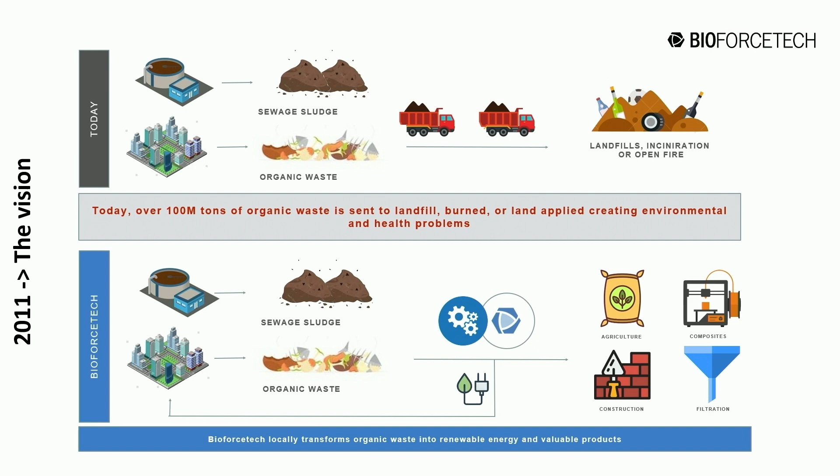So the first thing we did is we were like, okay, let's make energy out of it, and maybe a product will come out. So we started with the mini gasifier, which was a terrible idea because biosolids is full of minerals. Those minerals solidify in the gasifier, and you find out that the whole thing gets stuck with this very hard material within a few hours.

And it was good, but the thing is, we needed a lot of fuel because we had to dry that biomass, and so there were still some issues. So we said, okay, we need to focus on drying then, because if we have all this biomass but it's full of water - there's 80% water - what do we do? How do we make it into this final product, or how do we make energy?

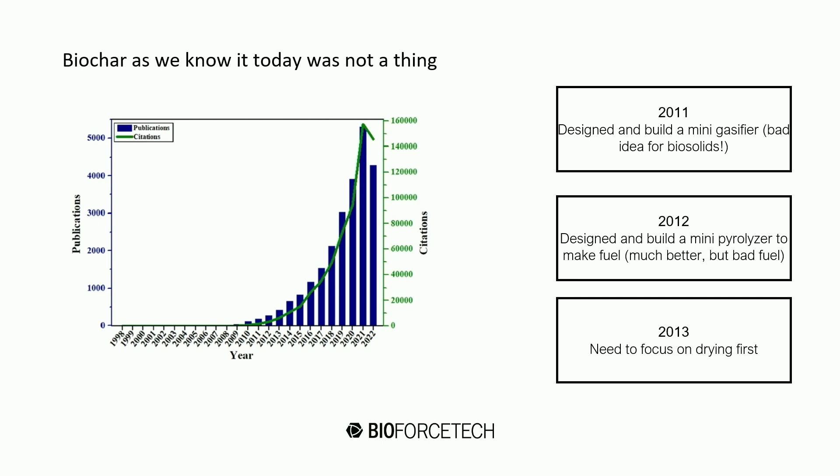And so we pivoted completely. We're like, all right, we need to invent a dryer, because dryers are available in the market, but they use a ton of energy - more specifically, about 1 megawatt hour per ton of biosolids just to get to the dry part. And then with the pyrolysis, you can make maybe 300 kilowatts. So it's completely nonsense - we're not making a sustainable solution like that. We're just trying to get rid of waste.

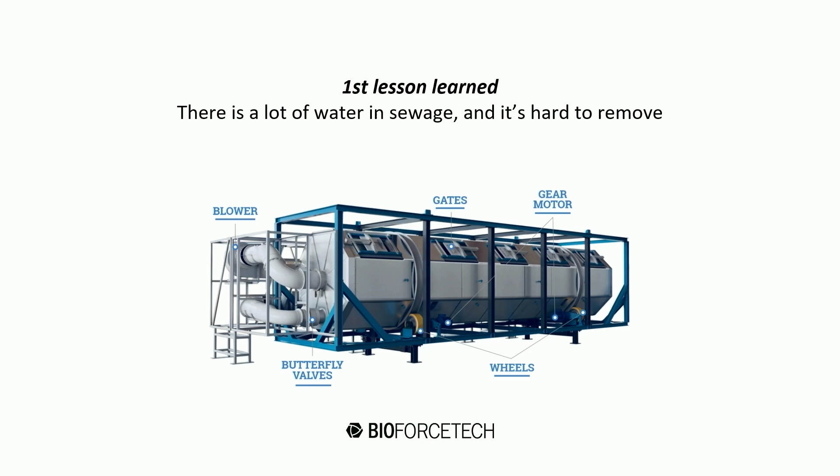So the first lesson learned is that there's a lot of water in sewage and other types of organic waste. So we invented this machine. It took us a few years, but the concept is we have this big vessel. We load about 8 tons of material in it, and with the batch process, we optimize it so much the bacteria can heat up the biosolids on its own without external heat to about 65 Celsius, which is decently hot. That's enough for air flowing through to just evaporate the water naturally. That let us save about 70% energy compared to other systems out there.

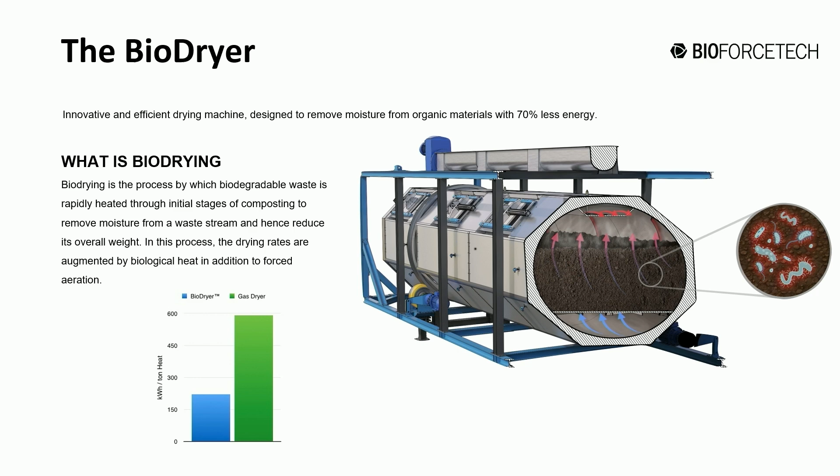So we found something that was good as the first step of the process. We pivoted and then it went pretty well, because we now have more than 50 of these units running already, with many, many more to come throughout Italy and the United States. It's for sure the most efficient dryer on the market.

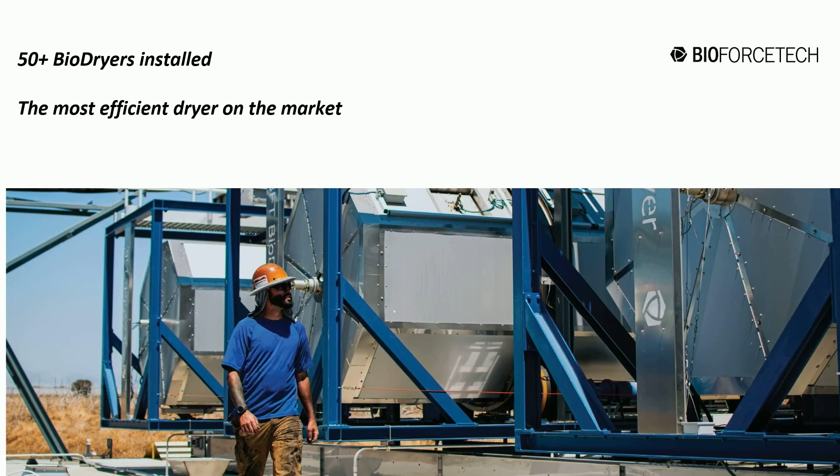But the lesson we learned here is that with new tech, if you're inventing something new that didn't exist, like a biological drying system, it's never going to work the first time. So if you're thinking about an innovation, I'm sure I'm not the first one to say that, but it hit us. We were young and naive, and we thought we'd design it, it would work, and we'd sell many of these. Absolutely not. It took forever.

The first biodryer, for example, was very efficient but super slow, so it didn't make sense financially. The second one was efficient and fast, but required too much maintenance, and so on, and so on.

All right, then we had a dryer. We could do pyrolysis. So we were like, okay, now we're going to start building systems and installing them. We decided to start in California, which has the strictest air district in the country. To be able to turn on something like this, you need permits, and permits took us 4 years. So you're a startup, you invented new tech, you already spent a lot of money, now you want to start making some money, and that slowed us down for 4 years. But still, that brought us to have the first pyrolysis of sewage sludge in the United States permitted, and it was permitted in San Francisco, which then allows us to distribute it around the country with ease.

So the third lesson learned is that it's going to take much longer than anticipated. Any project, I'm sure everybody knows it, if you've ever worked on your house or built a new house, it usually takes double. It took us a little bit more than double, but it took us about 10 years to get to a reality where we had an actual system running and producing and doing what it was supposed to.

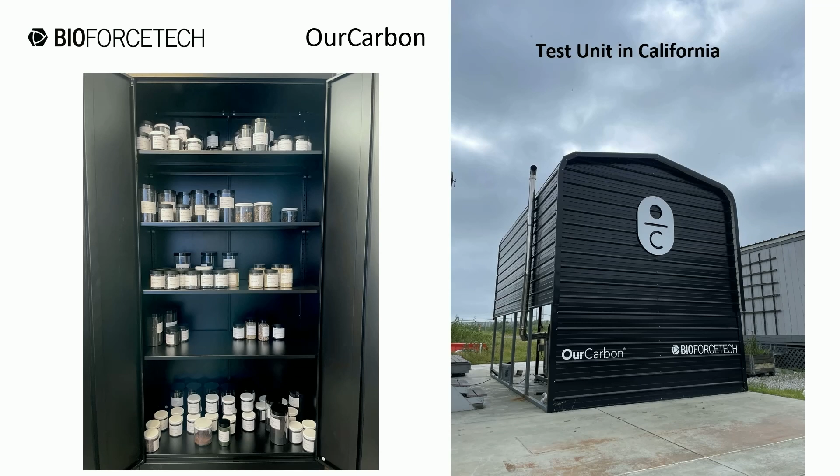So first, we have a test unit in California. It's a tiny little unit, but it replicates the full scale. We've already done hundreds of different types of biomasses, and we use it to study how the biochar looks in many different residence times and so on. The unit is meant to replicate the big one, and we contract with different municipalities or waste producers to run tests on it, setting very different residence times and temperatures, fully automated. We can produce just a few kilograms of biochar per day, but that's enough for us to do the tests we need.

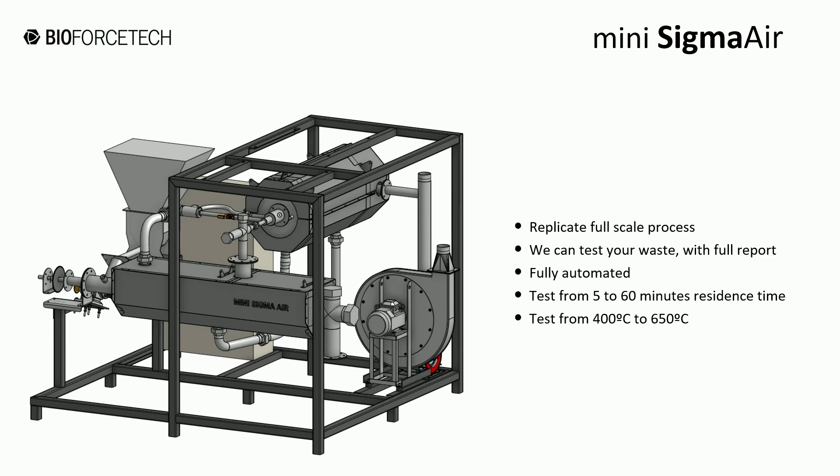OurCarbon focuses on many different industrial applications. The only thing we don't do is agriculture—there's so many of you working on agriculture, there's definitely no need of another one. So we focus on energy storage, concrete, polymers, and inks.

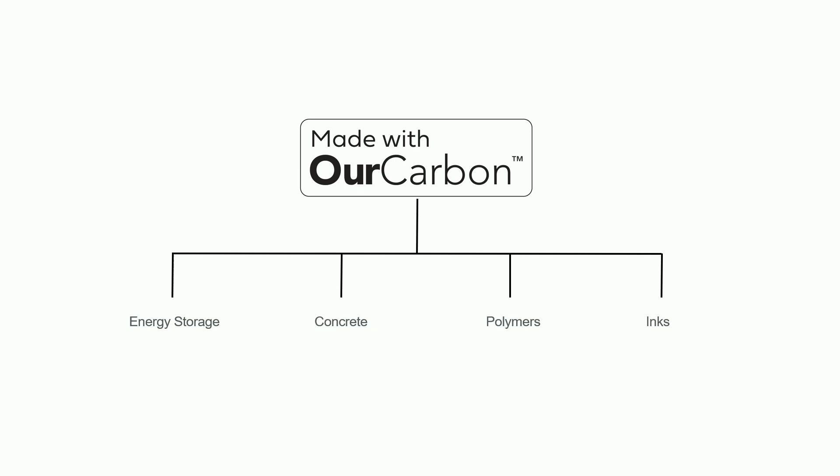Our Carbon started in 2020, so it's been 5 years. We worked with hundreds of different industries.

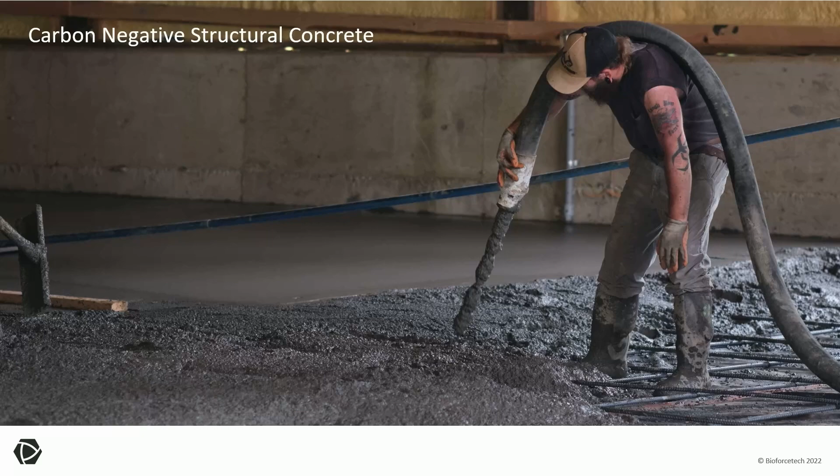One of the main ones—our biochar mostly goes into concrete because of the mineral content. Our biochar actually improves concrete strength up to 30% load, and it's able to bring down the carbon footprint of concrete to zero or negative. We've done the first structural concrete building of its kind here in the United States and won the award from the Concrete Association of the United States. So that's one of the applications, and it's working right out of the machine.

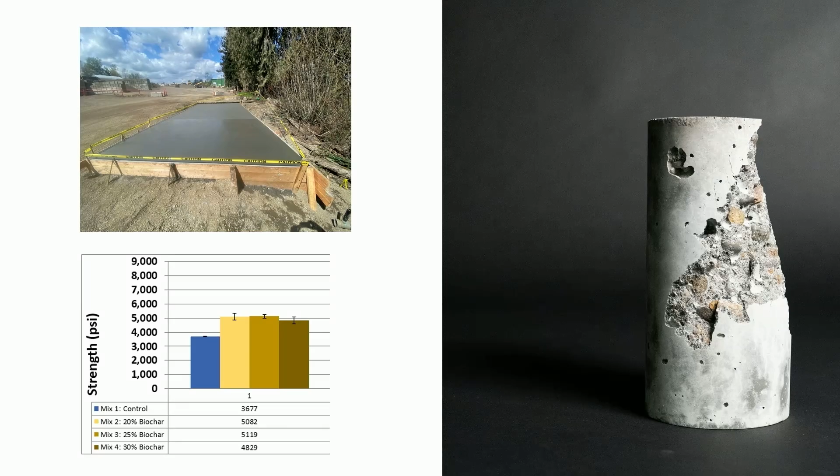Another way we do it: we micronize it into a pigment that's less than 5 microns in size, and we use it for screen printing inks. For example, my shirt right here is printed with it.

We also use it in plastics as a replacement for carbon black. So the idea is we study all the different types of plastics, how much load we can put in it, and all that kind of stuff. But the idea is to replace carbon black, which—every black thing you've ever seen in your daily life—is made with petrol that has been burned badly. We import it mostly from Asia and it has a high cost. So we're doing a replacement for that.

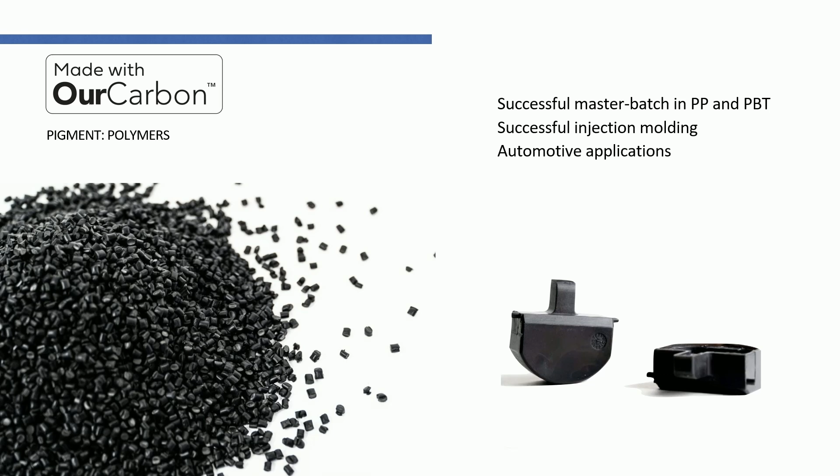It works very great in some types of plastics compared to wood biochar, because wood biochar is light and carbon and it doesn't like to bind with plastics too much, but ours does.

The fourth lesson learned is one that everybody knows: not all biochar are created equal. For special industrial applications, you require extreme precision, process consistency, and definitely feedstock consistency as well.

So the unit we worked on is a hybrid pyrolysis unit, which heats up the reactor in 2 different stages. The first one uses a syngas combustion chamber, like many others. We collect that heat and then use it to heat up the first part of the reactor, providing about 80% of the energy required for the carbonization process.

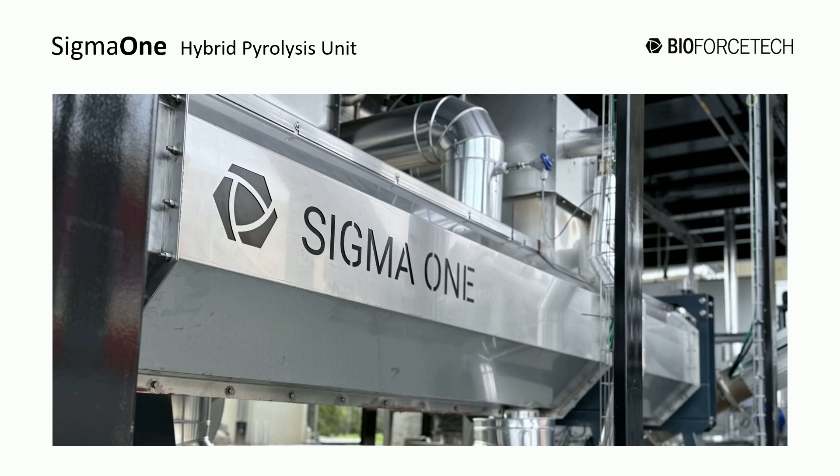The second step is electric. The electric side only contributes 20%, so it's not like a full electric pyrolysis, but it allows us to keep a very, very consistent temperature. So it's a compact, modular design.

We test it and wire it directly at the factory, so when it arrives, in about 3 days it's ready to go. You can set points just like the mini unit, between 5 and 60 minutes, with temperature set points between 500°C and 680°C, and we have a precision of about plus or minus 1 degree Celsius. Every time you change the parameter, you can change the characteristics of what you want to come out.

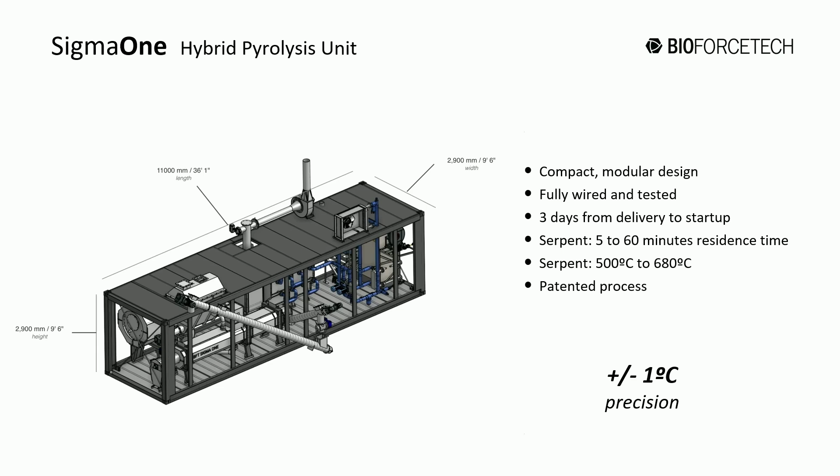Here's just some pictures of arriving at a site in Italy when we were doing the first testing.

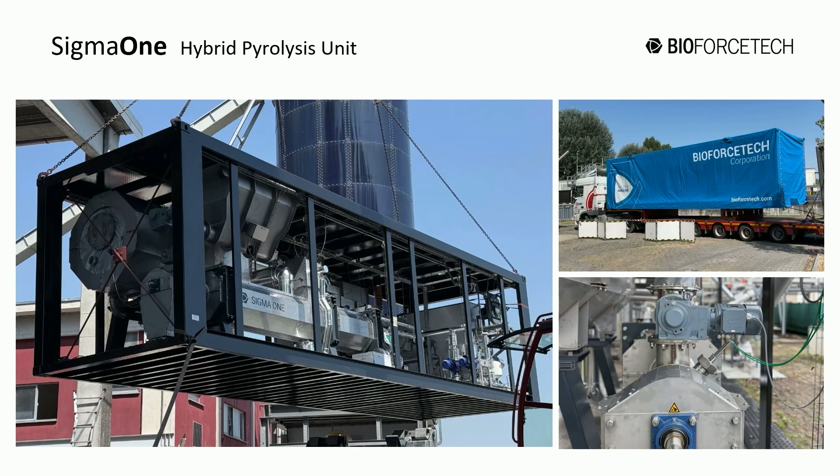And this is the last lesson learned. One of the most important things I've ever discovered—and I know it's supposed to be a known thing—is that if the machine is not easy to operate for an operator, or it's not running smoothly, that creates a giant paperweight. We've seen that with many technologies out there in the past. So if any of you are manufacturers, please make sure the machine is very easy to operate and maintain for operators. We focused on that a lot, and we believe this is the solution.